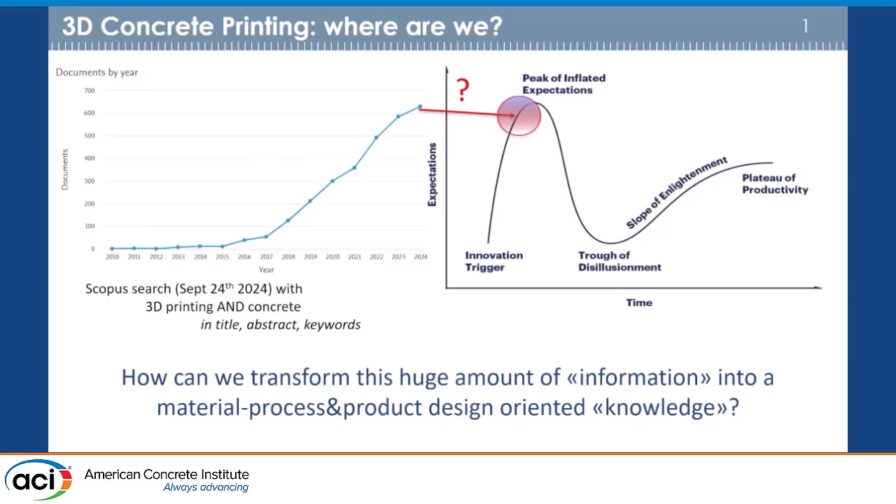Are we close to the peak of inflated expectations in 3D printing? After that we will have a sort of disillusionment phase, or have we already passed it and we are on the industrial uptake? Well, wherever we are, it's likely that we now have in the literature and in the applications a lot of information that has to be funneled towards knowledge, and most of all towards design-oriented knowledge.

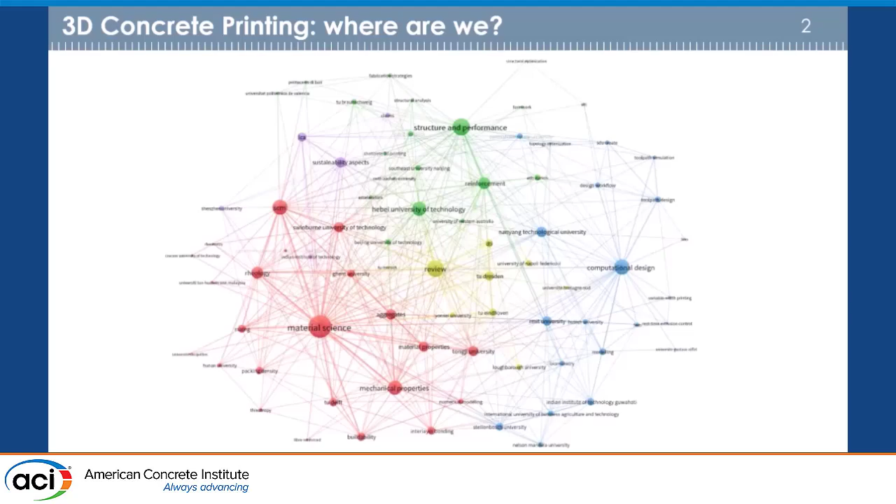Also, if you go through the literature, it's quite typical nowadays to have these conceptual maps which highlight the different topics and issues that come into play. In 3D concrete printing, we have to go through material design, process design, and structural design, and we have to find the effective way to combine this.

Surely everybody knows about this, we have also listened to very interesting presentations about that. But the issue is that up to the fabrication of a 3D printed element, we have to cope with the pumpability issues, the extrudability, and the buildability.

A lot of effort has been done in past years to try to correlate this conceptual performance to mechanical material performance indicators. There is quite a consensus that pumpability depends on the rheological properties of the material. Extrudability, in a sense, you can correlate to an early age tensile strength of the material to avoid the tearing off of your filament, and buildability is a development of early age shear strength, but most of all compressive strength and elastic modulus, because you have to cope with the two different mechanisms of collapse, which can be plastic or buckling.

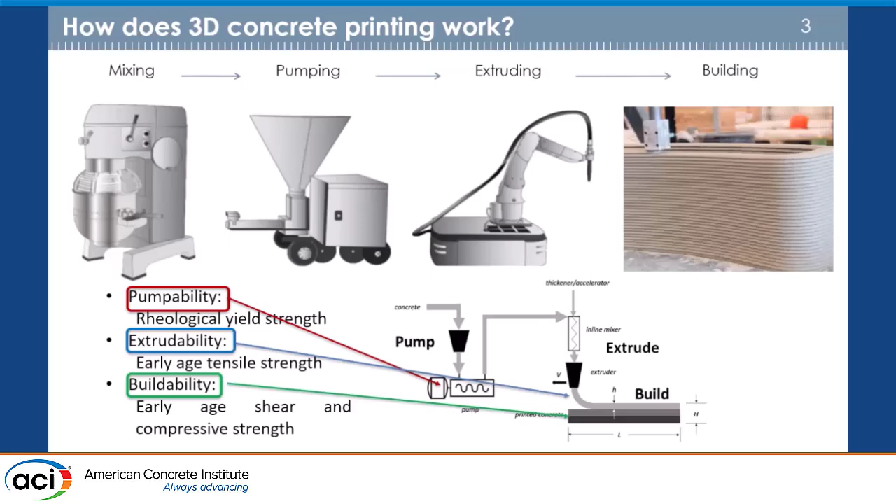Then it comes into play the fact that, for example, when you go to rheology, 3D printing mixes are extremely stiff. So if you want to make a rheological test with rheometers, you need extremely powerful rheometers. This is a picture from an ICAR rheometer we have in our lab.

You need to cast liters and liters of concrete, and most of all this does not comply with the 3D printing equipment facilities. It has been quite a challenge also to test the material performance at very early ages. This is a compressive strength test done at one hour on a specimen, and it's something that we need.

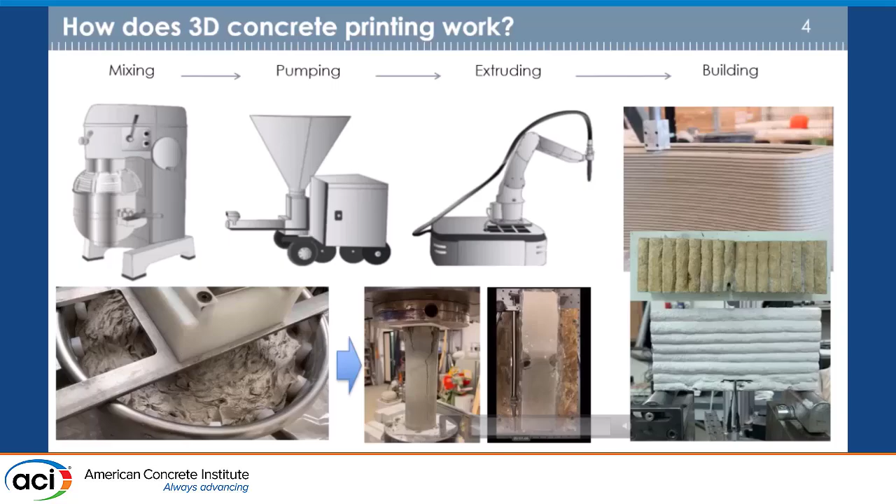For tensile tests, some methodologies have been developed, borrowing them from self-compacting concrete technology. And we have also seen in the last presentation the challenge to identify an interface fracture parameter, because the material is anisotropic, and if you want to simulate the structural behavior, you need also to know how the interface behaves and which properties you have to assign to them.

So basically, these are some of the results that we obtained in our lab with the different methodologies I showed you before, about the material thixotropy, early age tensile and compressive strength, and the anisotropic response in the different directions.

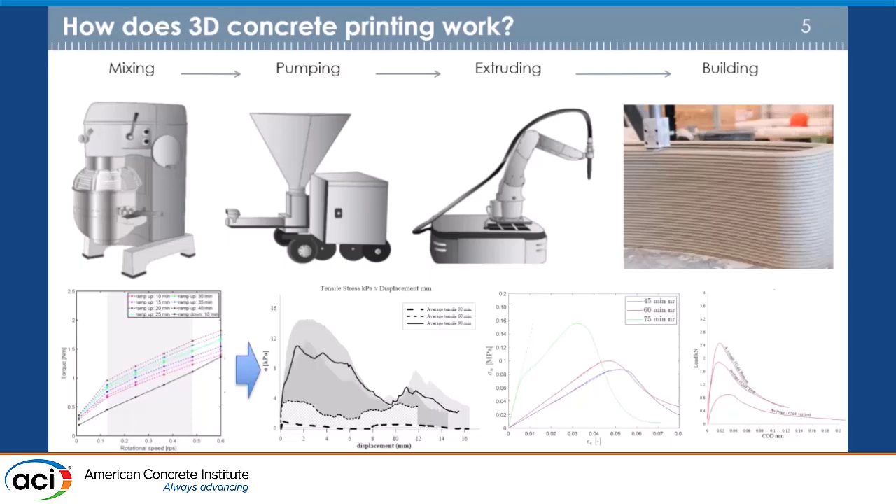So what we try to do, the approach we wanted to follow, is, as I said, combining material, process, and structural design, focusing at the moment on material design and process design in order to integrate different variables which basically deal with the material composition and how it affects the rheology and the mechanical properties, but how these also match with the printing parameters, because you can have nozzle geometry, nozzle shape.

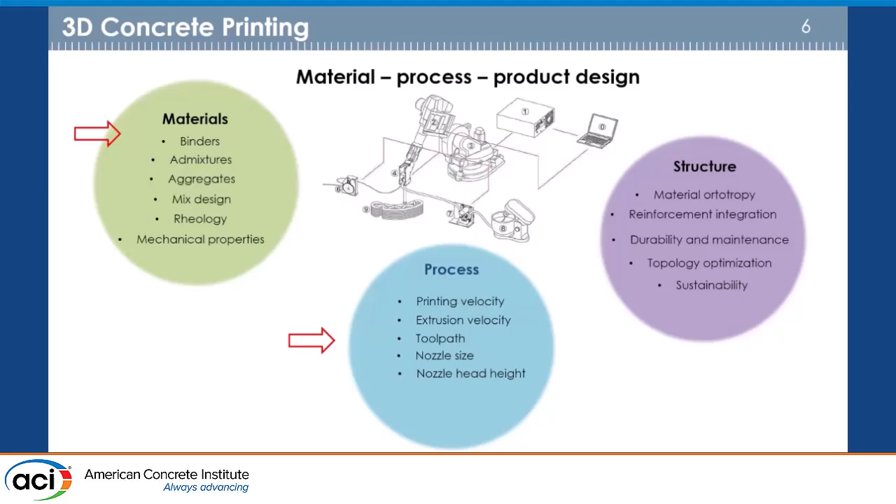But also the velocity of the printing, the extrusion velocity, and also the configuration of your printing, in order to avoid the well-known errors or drawbacks that you can have in 3D concrete printing.

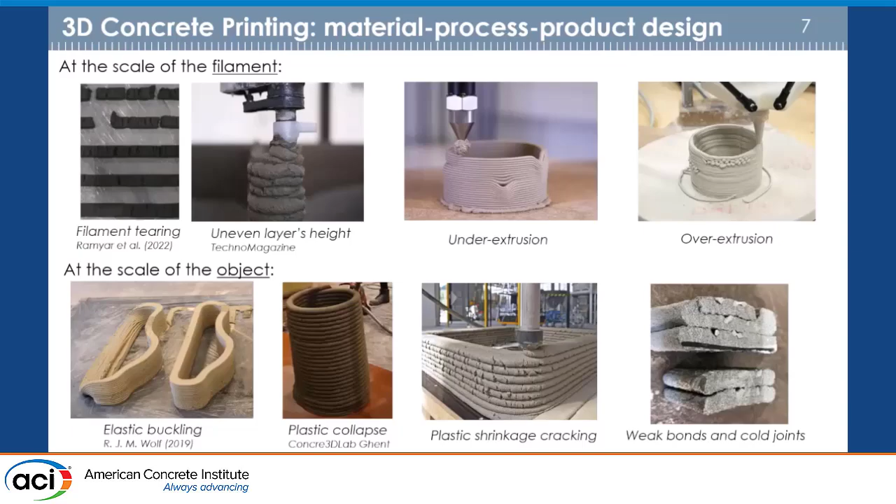And actually, what has been done so far? Most of the work, if you review it, is done on a trial and error approach, which as a matter of fact is time consuming.

Numerical simulation can help, but at the moment we are in an early to medium stage of development of these processes, mostly because of the very high computational cost required to model a real 3D printing and construction process, and especially to embed phase changes and so on into that.

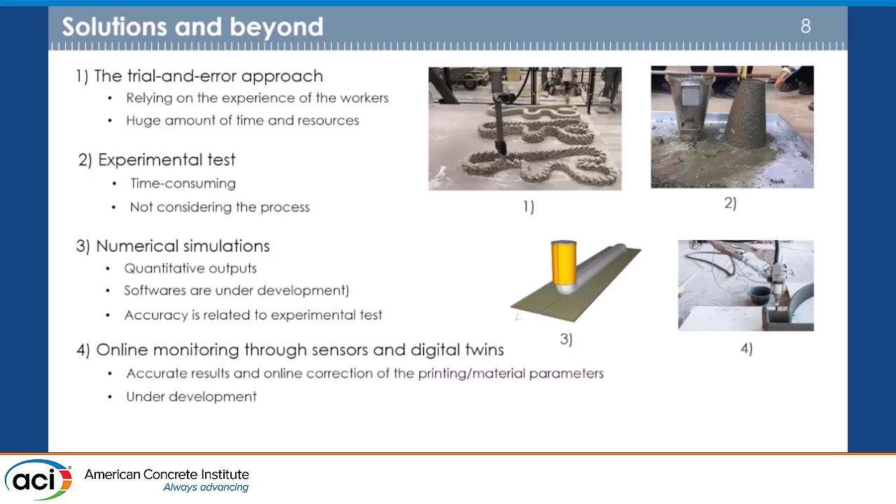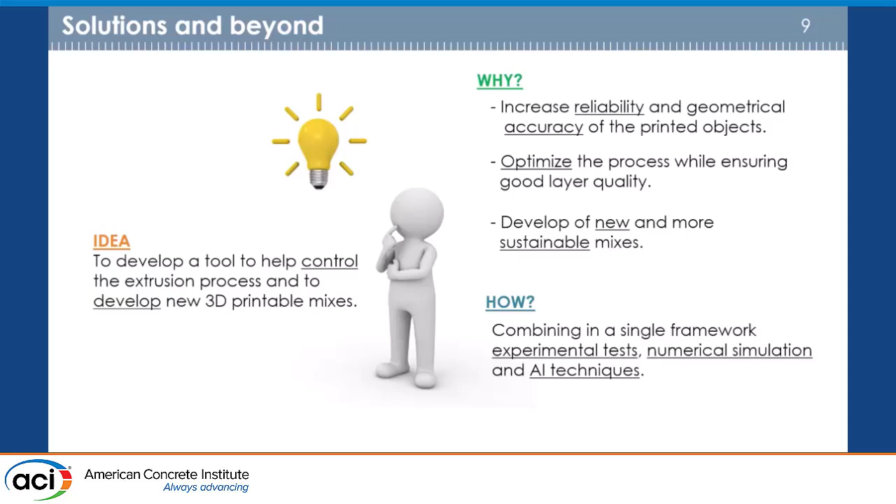So our idea was to do this: develop a tool which helps control the extrusion process and develop a 3D printable mix without going through trial and error, combining experimental tests at a reasonable scale, numerical simulation, and AI techniques.

So where did we start? We started with a tentative mix design and a tentative rheology, and tried to use that as feedback back and forth for an artificial neural network. But when we went into the rheology, the issue, as I said before, was how do we measure it, because with most commercially available rheometers, it's quite difficult.

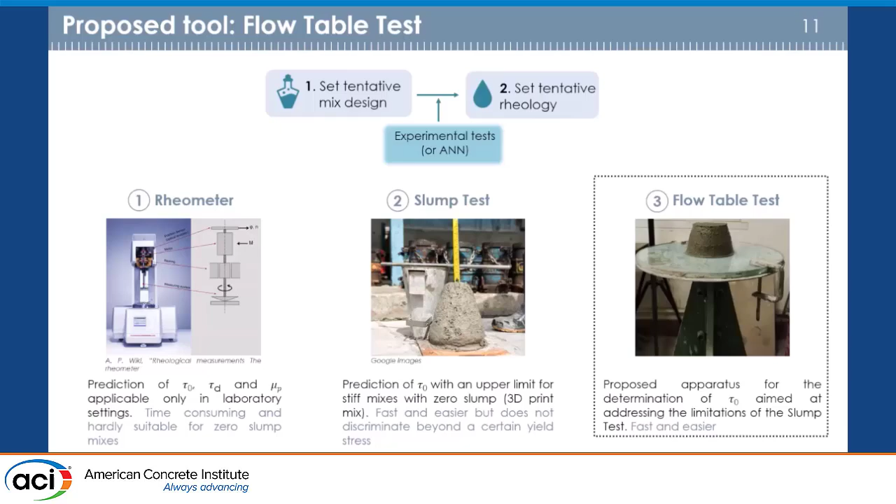So we went back to the flow table test, which seemed quite reliable and effective, also if you want to do it on a job site to control the rheology of your 3D printable mixes. We started with 3 mixes found in the literature, and worked out the flow table test, identifying from the rheometer the yield stress and viscosity parameters.

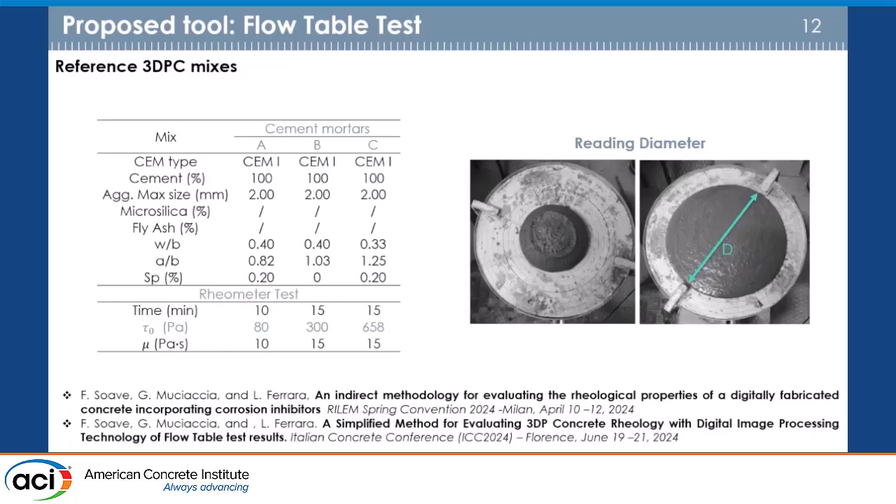Then, to process back the results of the flow table test, we used 2 analytical approaches available in the literature that were quite popular specifically for self-compacting concrete tools. The left one is the formulation proposed by Nicolas Roussel, which works pretty well for self-consolidating concrete, and the other one has been proposed by Kurokawa.

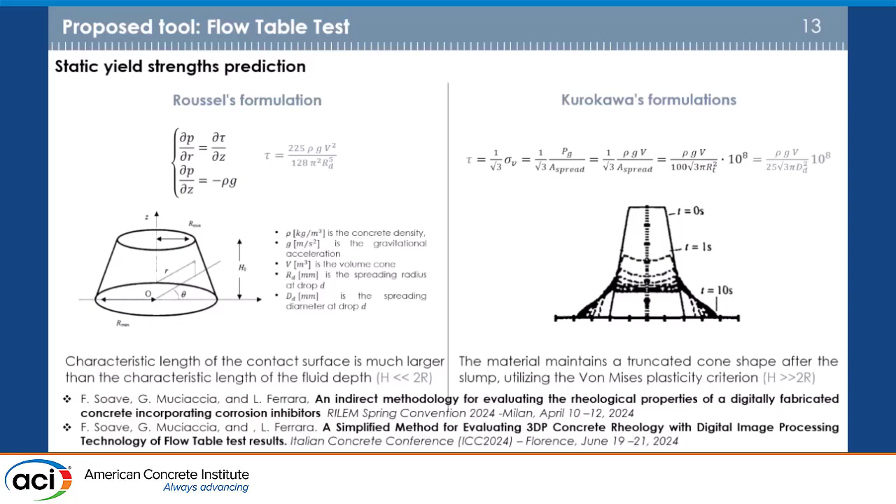What is the difference between the 2 formulations? One, as I said, works very well for SCC, a material with relatively low yield stress, because it's based on the fact that the truncated cone shape converts into a flowing putty that is completely flat. The other works for medium to high yield stress concrete because it's based on a combined shape: part of it is flown and another part remains in the form of a truncated cone.

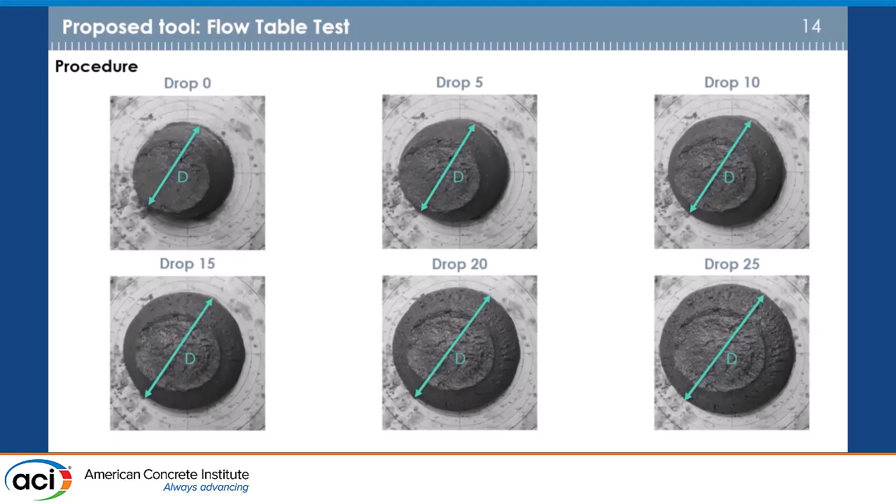We also used digital image recognition, taking movies of the flowing putty, identifying the geometry, feeding it in, and validating the approaches.

For the 3 different mixes, the rheometer measured yield stress of respectively 80, 300, and 658, so very low, medium, and high. You can see that the Roussel formula works pretty well for the lowest yield strength concrete, works reasonably well for the medium one, but does not predict it for the high one.

So likely it's a combination of the 2 approaches that we need to use in processing the results for the yield strength parameter.

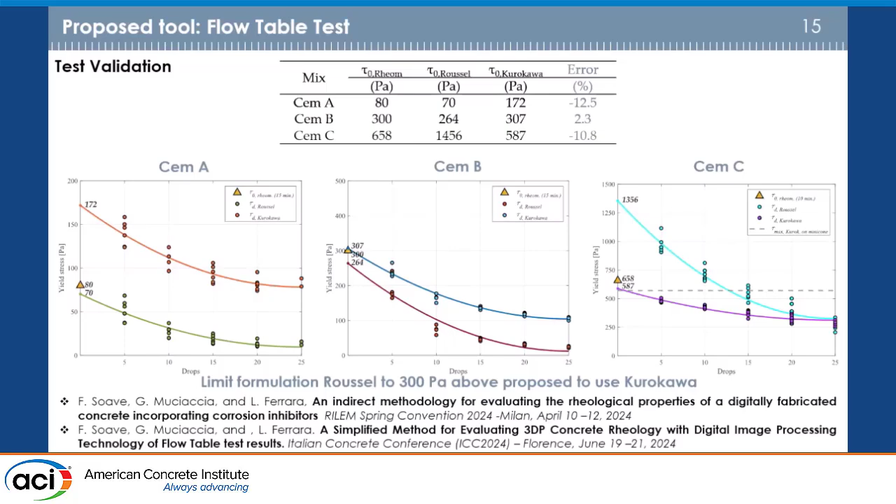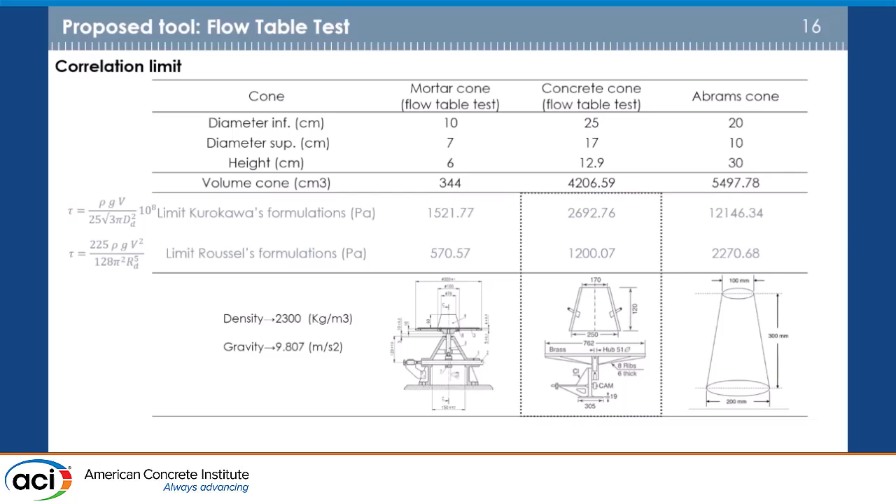The limits also depend on the volume of material you test, because we tried applying the tests and formulations not with the truncated cone for mortars, but with the large slump cone for concrete, and found out that it actually depends on this. So we ended up with a medium size in our lab, which yielded reasonably good correlations.

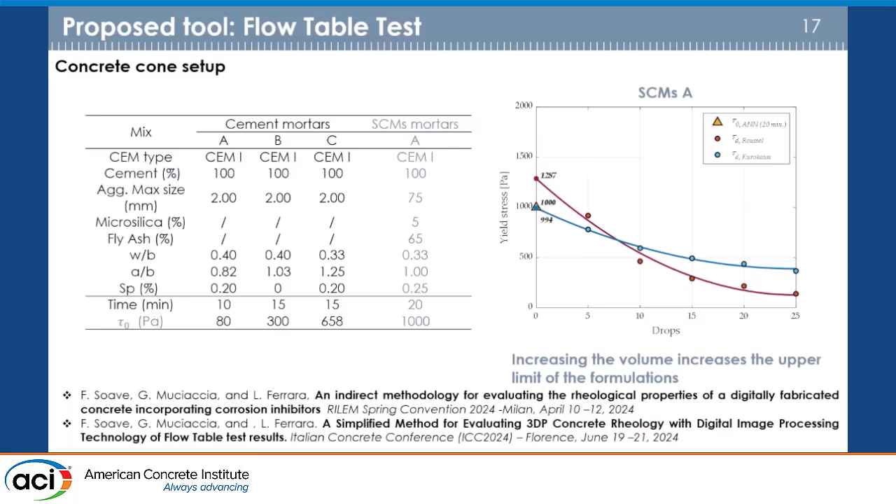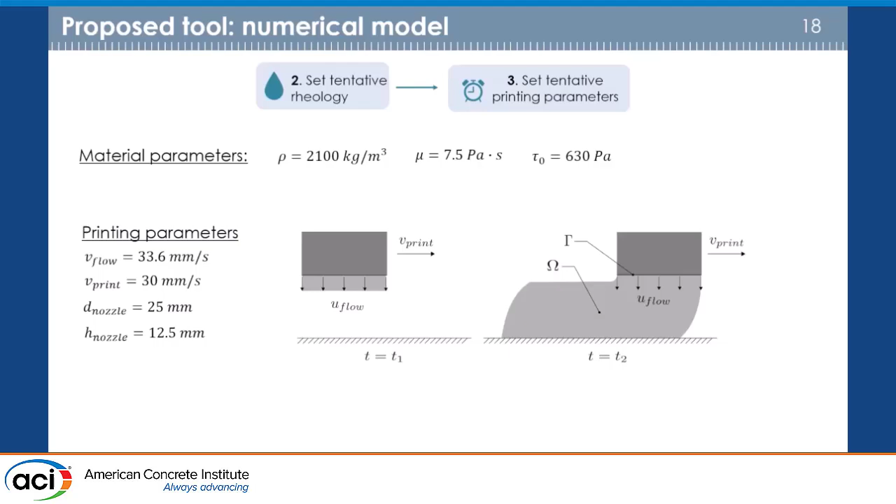We used these rheological inputs to feed a numerical model based on continuum fluid mechanics that we developed in our lab to simulate the 3D printing process. This is the last one on the right, by Giacomo Rizzieri, who is finishing his PhD thesis now on these topics.

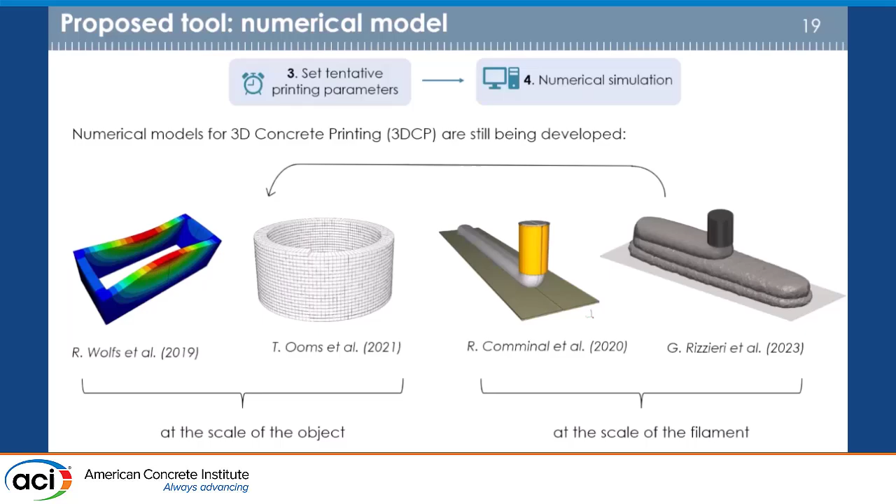It works at the scale of the filaments. We are able to simulate the printing process, based on the Navier-Stokes equation with the balance of linear momentum and balance of mass, and we implemented a Bingham fluid model into this, so rigid plastic if you will. We are now going to implement rigid viscoplastic, and also elastoviscoplasticity into that.

It's based on the particle finite element method. We start from a set of points and generate a mesh through the Delaunay triangulation process.

After that, we implement an element distortion control technique, which not only removes elements that are too distorted at the start of the problem modeling, but also helps keep the computational time reasonable by removing elements that become too distorted during the deformation process.

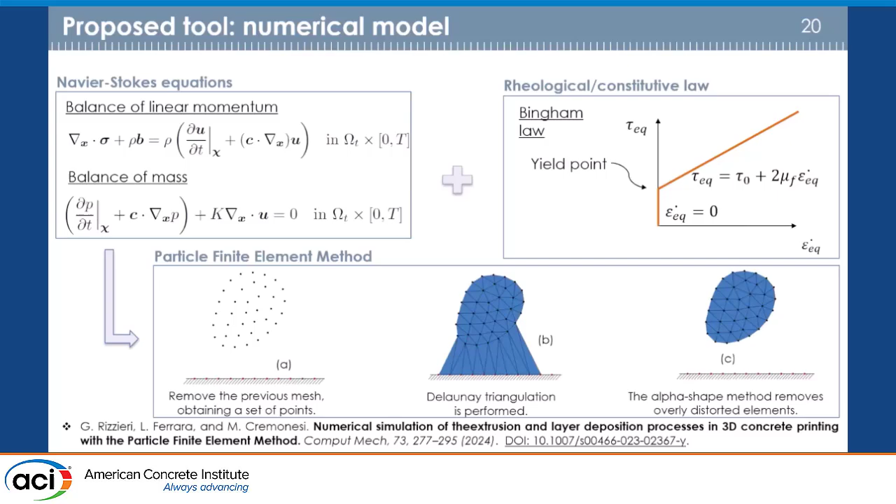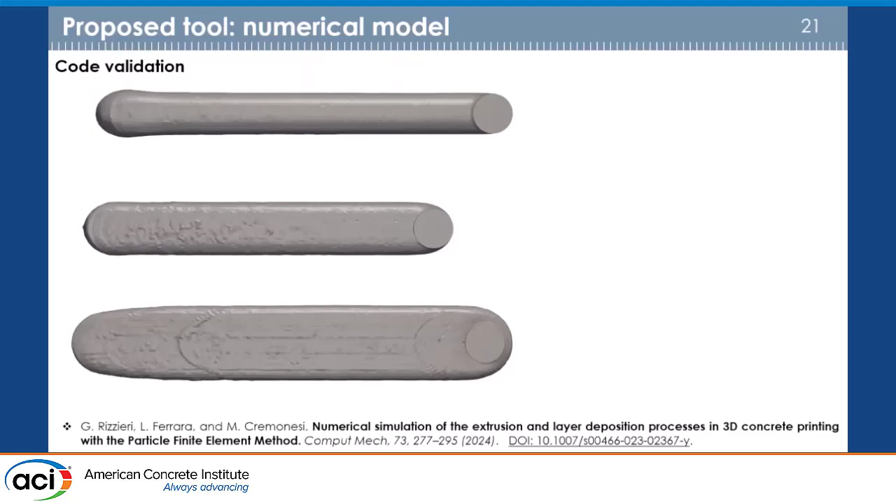We calibrated and validated the model with our own results and some from the literature. You can see some printing processes varying print velocity and yield stress, and you can see that if you print too close to the surface, for example, you get a flattening of the filament deposition. The comparison between the experimental and predicted results is shown here.

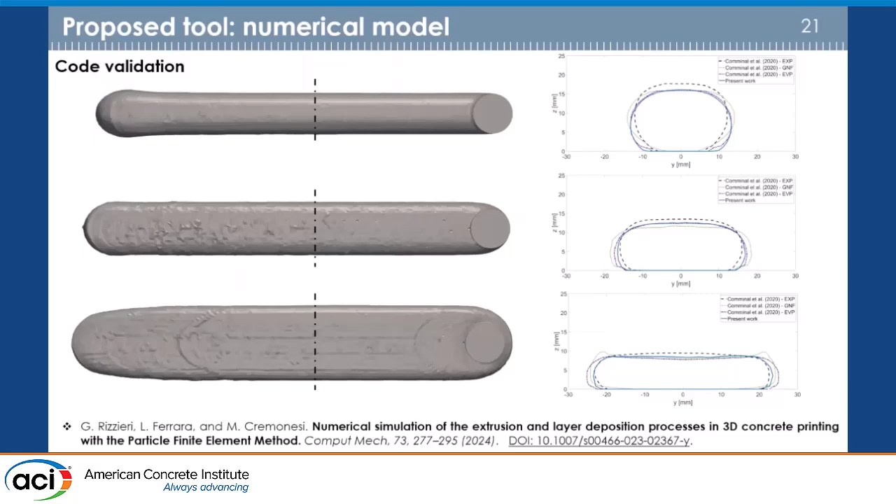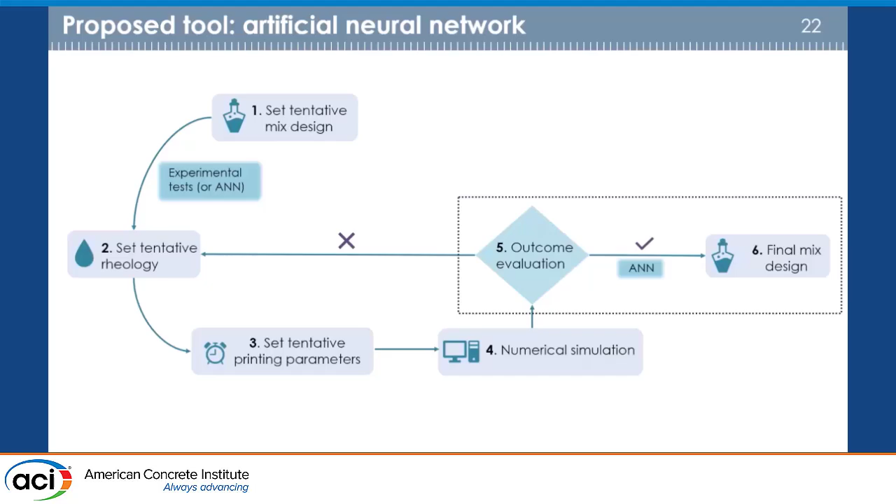So this was the first part of the work. Then we wanted to feed this to help with an artificial neural network tool, because we said, okay, these are mixes from the literature, but what if we want to design our own mix with our own constituents? So first of all, we had to build up our tool and identify which are the relevant input and output parameters.

Through a simple literature analysis and frequency of the records, we ended up with the list of inputs, which are basically mix design parameters. Well, this is quite a hard task because in the majority of the papers on 3D printing, the information on the mix design is obscure, foggy, given in strange proportion ratios, and because of industrial protection reasons and so on.

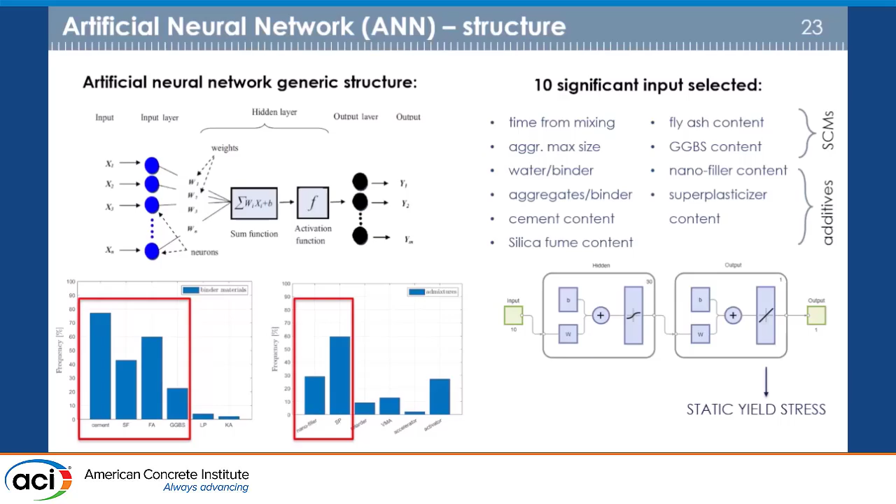As a matter of fact, this makes it difficult to have a consistent set of data that you need to feed the data analysis tool. We wanted in the beginning to end up with a double output network for both yield stress and viscosity, but then viscosity is not as important for the 3D printing process. On the other hand, if yield stress is not always present in all the papers, viscosity is even less present, so in that case it was even more difficult.

The other thing important for 3D printing was the time frame over which the yield stress parameter has been measured, and where this time frame starts, from the contact of water with the powders, which is what we agreed upon.

But we found, for example, going through the papers that contained this information, that about 70% of the data had a record which was in the first 40 minutes, which we deemed as reasonable for a 3D printing application.

This shows you that, for example, starting already from a broad surveyed literature which yielded us only 485 records in terms of information on the mixes, if you have to clean up and keep only what you really need with complete information, you go down to 304 measurements for which you have the complete information also about the time at which it was measured.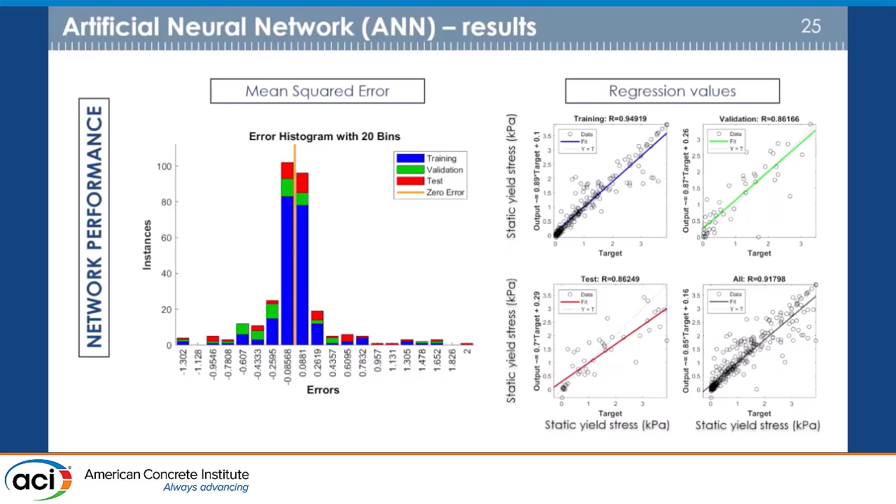We used the usual tools for calibration, feeding, and training. But what was quite interesting is that in the end, we tried to design 5 mixes completely from AI, basically, and we obtained reasonably good predictions. Just in one case or 2 cases there was fairly high error.

There is also the problem that with such a low amount of data, you can risk in some cases the overfitting of the network, because it has learned from itself to be too good at making this performance.

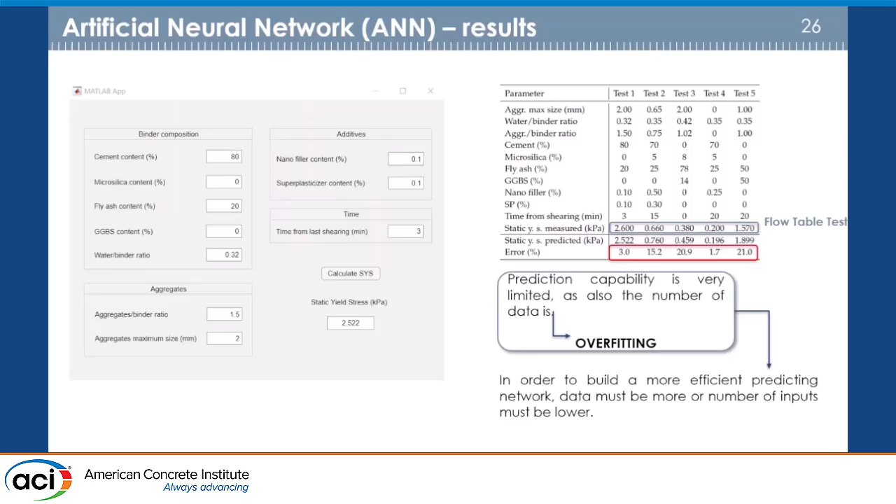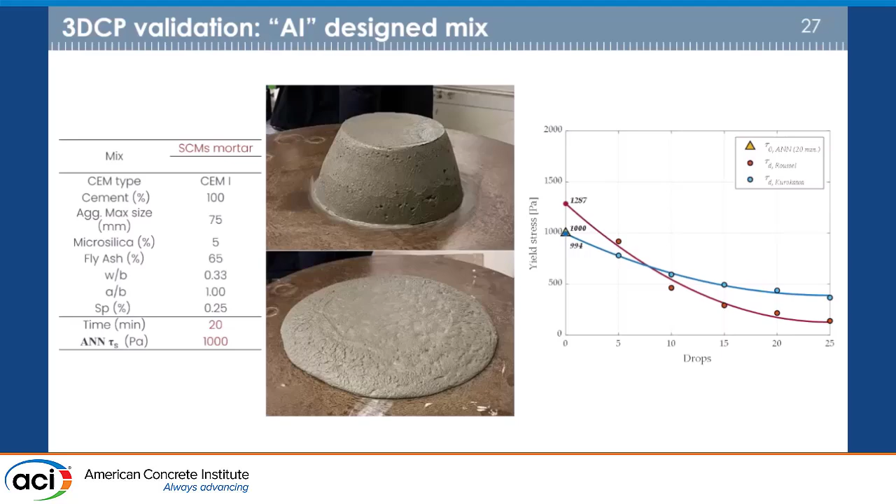But in the end, among these 5 mixes, we selected one that was able to fulfill the predictions that we have both from the literature and the AI worked fairly well in giving us mixes, which behaved well there, but also which was behaving well in the first small-scale printing process that we did.

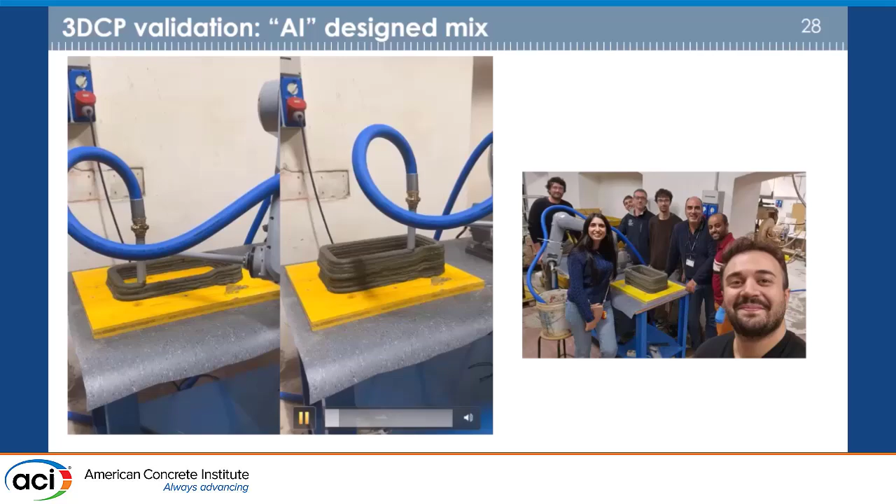And as you can see, well, you can claim if you did everything with AI, why are there so many people happy about the results? But this was the students who collaborated in developing all the different parts of this work, in which we combined experiments, artificial neural network analysis, and the modeling for the 3D printing.

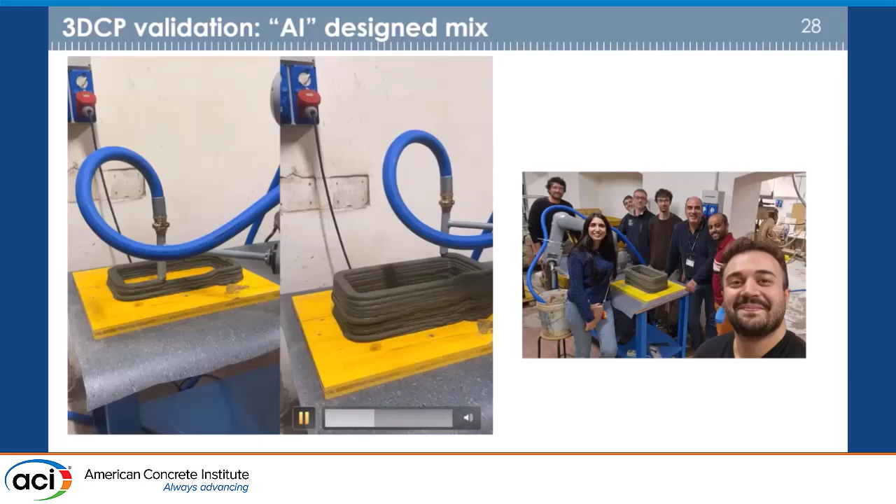So coming up to the conclusions, I think that we are just in time. In this study, as a matter of fact, we have provided a contribution.

Integrating experimental testing, trying to identify also a test which could be good for field measurements of the rheological properties of a 3D printing mix, and have combined it with an artificial neural network simple model which helped us in designing the composition of a mix with the required rheology, which proved fairly well from the test, from the flow table test.

Also, we pre-designed with a computational fluid dynamics modeling tool our 3D printing process, and the results of the modeling, which was calibrated on the literature, were fairly respected in the first experimental trial test that we did.

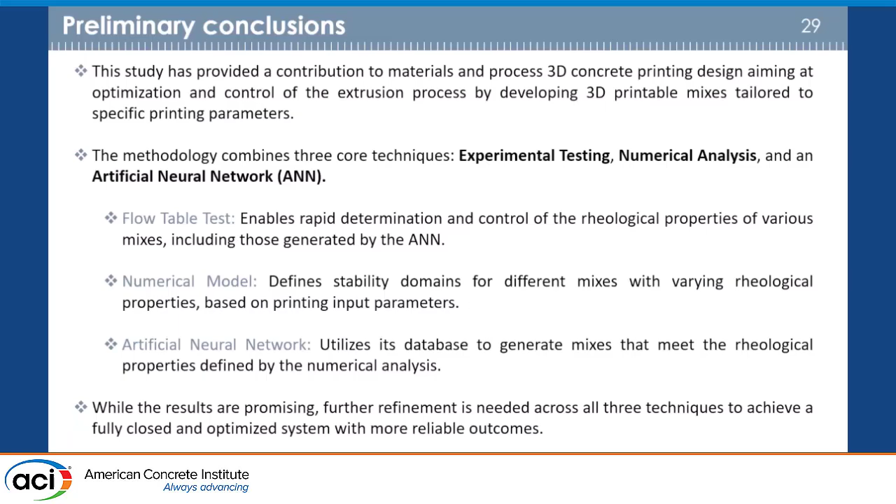As a matter of fact, everything is quite promising, looks very promising, but surely we need further refinement and also enlarging the database, and also as a community to agree on the ontology of the data that we need in order to make all the research and knowledge that we are developing useful for developing design-oriented tools.